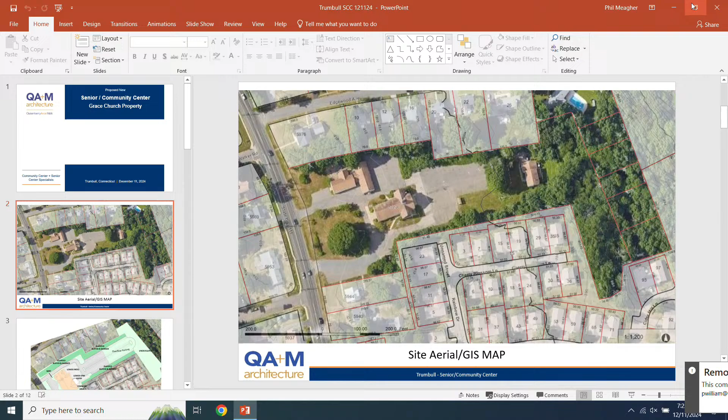He's controlling it. You're not? I got it on. You should be able to. Your presentation, I hope. Talk into the mic, we can't hear you over here. There's like a vent that's on. I gotta talk loud, huh? Okay.

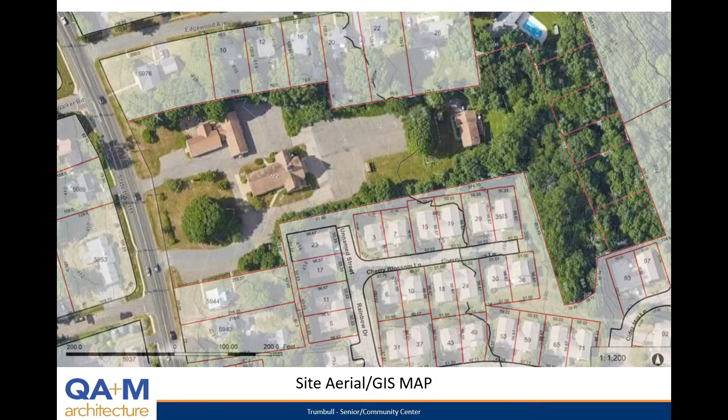Okay, so here we are with the site aerial. For your question, Mike, the trees in question are in that big center area, and yes, the building is basically on them, right next to that big tree. It's not actually on it, but it's next to it. But the parking lot would be where it is now.

So here's kind of a proposed schematic look at the site plan. You see the gate on the drive going down. I changed the label for the planted buffer, so it's a planted buffer and a barrier around the two side property lines. You see the overflow parking, and then we're labeling the back of the property undeveloped. We don't have any plans on doing anything back there.

Then some of the additions that came from the plan changes with the manipulation of the gym: we have a lower gym entry or kind of a little amphitheater. One thing Tom and I talked about today was, we see how it is there, that's about 1,500 to 2,000 square feet of patio outside the activity room. He was thinking we can actually make that area bigger, to extend it to the east and create a nice outdoor area that's kind of sunken in.

So upstairs, the plan really hasn't changed much. We've added some things to help you visualize what goes on in the spaces. As you come in the front vestibule, you still have the library lounge on the right side, the admin area on the left—or I guess it's everybody's right and left opposite as you're looking at it on the screen. Bathrooms, then you come down to the cafe space, and we've laid out a furniture plan for it. We have an outdoor patio that would be outside the games room and accessible from the games room, and then a conference room.

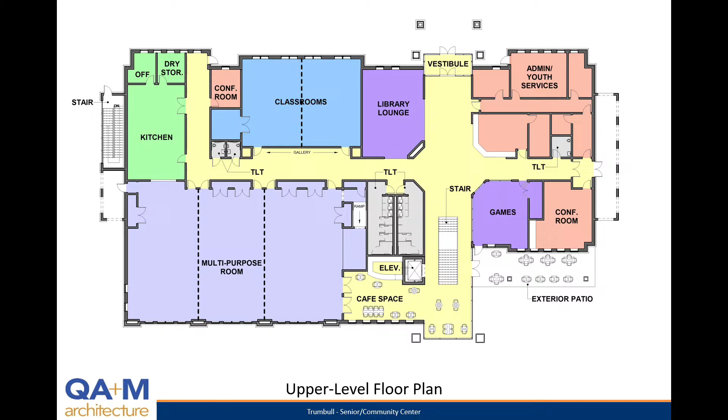And this is the newer plan downstairs. If we come in from the bottom, you go in the vestibule, into the lobby, there will be a grand stair, a monumental stair that will take you up to the upper level. You have the food pantry with 3 offices inside, and as you go back, the arts and crafts room is on the right. Then toward the end of the hallway, you take a left, go down a ramp—it goes down about 2.5 feet—and you get into the gym.

So the floor level from the main part of this lower level to the upper level is 21 feet. Now you go down another 2.5 feet, so that gives us 23.5 floor to floor, which should give us about 19.6 to underside of structure—so you're just about 20 feet to underside, and that's our estimate. We really have to engage our structural engineer, have a design made, and tell them to maximize the clear height at the bottom without going down too much more.

As you can see by the footprint, there is a basketball court that will fit—a middle school basketball court similar to what we had at Hardy Lane. Those are those lines, and then you have the 3 pickleball court lines behind that. We've changed the name—it's an exercise activity room—made to be used for dance classes, activity classes, pickleball, basketball, and you're high enough to do basketball, volleyball, and some other sports.

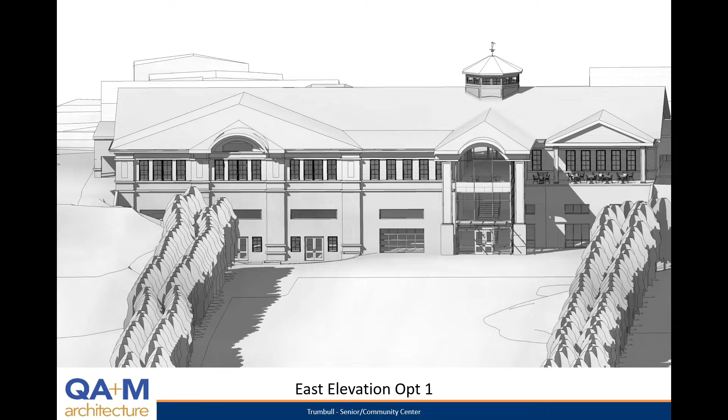On the left side of the building there's a sunken patio area. As you go over to the right, you have the access for the food pantry, then the main entry. Then there's the arts and crafts room on the right side of the building on the lower level. Above that you have the games room with the outdoor roof patio.

I see you have some of the houses modeled in outside. Would it be able to look at a point of view from the house? A lot of folks on the street were interested in what they would be able to see. Okay, that's something we can do next time. Thanks.

Dean Fabrizio. I just want to make sure they knew your name. Rocco, another question. Dave Galla.

So in these schematics, and this is very well done, I do like to see the buffer in there. That's incredibly helpful. All the plantings that are on both the left and right side of this particular image, would that include the current tree line that is along the Long Hill Village?

No, this is in addition to it. This is all up to our landscape architect to decide what goes there, to decide the heights and what's going to grow good next to those pine trees. Sure.

So it's conceptual at this point, but conceptually that's in addition to the pines that are there. The width of the buffer is what we're trying to get across with these images, that it's considerably wide.

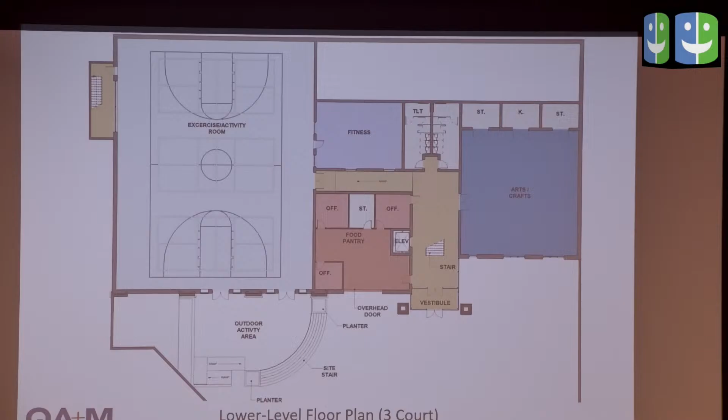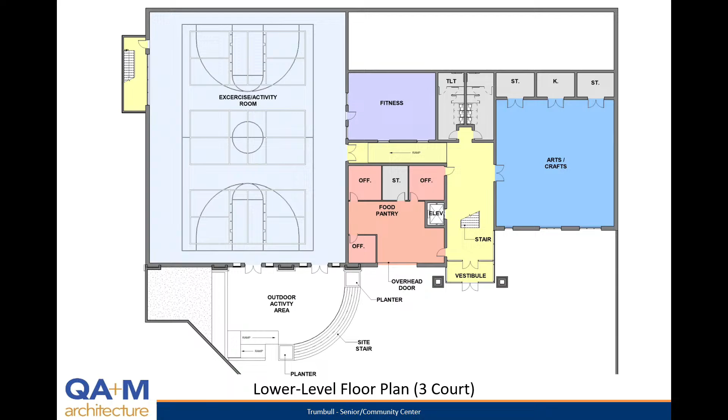Let me make sure the intent comes across that this is supposed to be a multi-sport space. The intent is not, by the committee standards, to introduce a space where tournaments can be had. We don't have the height for that. And if you look at the plan, there isn't enough room for bleachers, so there won't be any people spectating here. The intent for building out this space is for the seniors to have a spot for sport, for kids, as Lori mentioned. Ultimately, it's under the purview of this committee, and Michelle and Dimitri, to determine what happens in that space.

Well, I told Kelly she could go next. If you can turn off your mic, Ron, please. Thank you.

Are we moving on to other questions? Okay, the gate. It's not Ron. Vent off? Okay, no, the issue is the echo.

There's a way in and a way out, right? Are we only putting a gate on the one side, or are we putting gates on both entrance and exit? No, we're only putting the gate at the entrance to the lower parking area. Got it, okay, thank you.

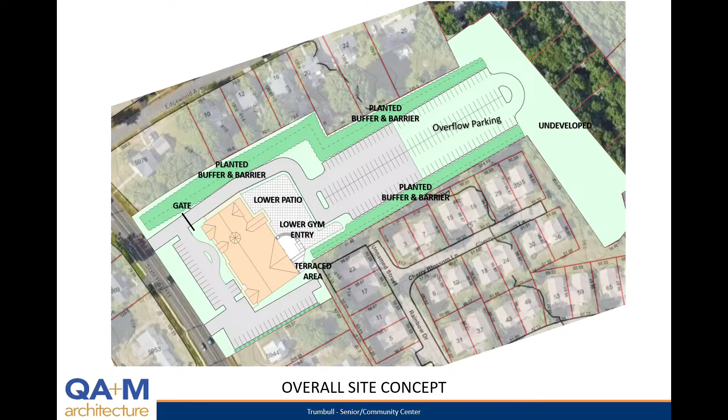Go ahead, Tony. Yeah, thanks, Don. I just wanted to voice my support for what Dave and Lori and others are saying. I think we are a community facilities building committee, and I think there should be some community elements here. I think a basketball court, some kind of compromised basketball court, is a good thing. We have other options for tournaments and intense use, but I think it would be short-sighted to just rule that out. We are, not for nothing, 38,000 people in this town, so we try to accommodate as many as we can without impeding on the neighbors. So that's my perspective. Thank you.

And Ron, just state your name when you speak, please. This is Ron Feligno. Dimitri, I know you're back there. I can't see you quite behind Rocco, but are you there? Okay, Dimitri, I'd like to ask you a question.

What is the actual activities that take place relative to basketball now through Parks and Rec? Well, Parks and Recreation, especially during the winter months, utilizes whatever available space there is within the school system. Excuse me, Dimitri, speak up a little louder, I'm having trouble hearing you, that's my fault.

Sorry about that vent. Parks and Recreation utilize gymnasium space wherever it's available within the various schools in town. Generally, we're not going into any of those spaces until school lets out, so during the day there's really no activity in this gymnasium or any other.

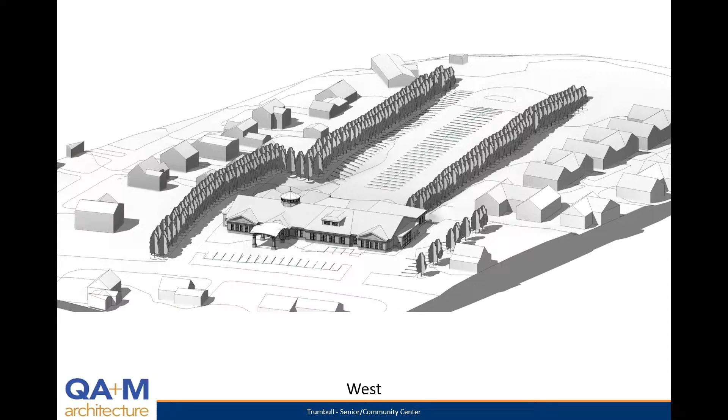One concern that one of the neighbors brought up on Edgewood was this cafe overlook that we have. Do you have any idea how much that's going to overlook neighbors' properties? Well, where it is, let's get it in the back. Essentially, the level of that overlook is at the street level, or the grade level of everything else that's around it. The only vantage point it has is directly east. It has some vantage point north, but that should be blocked by the barrier buffer area.

Also, the way the parking lot grades right now, some of the folks in Long Hill Village were concerned that the grade comes down towards their property. Would there be a need for retaining walls potentially for the new parking lot? That's something I really gotta have the site guy take a really good look at. My initial thoughts, in conversations with him over the last couple of days, are that we'll have to remove material to put the building kind of in the bank of the hill. Do we take that material and use it to berm up the property edges, to create almost like a little hill, to keep anybody in the parking lot from eyeballing into the neighboring properties? That's all my questions.

Thank you. Any other questions from committee members?

So just one further question. Dave Galla, and again Rocco, thank you for putting all this together. You just talked about removal of material and using that for berming. Could we also keep in consideration any possible drainage that may affect the neighbors on both sides of these properties and try to mitigate drainage issues? That's part of most zoning regulations, that you need to keep any water that's on your property. Okay, thanks.

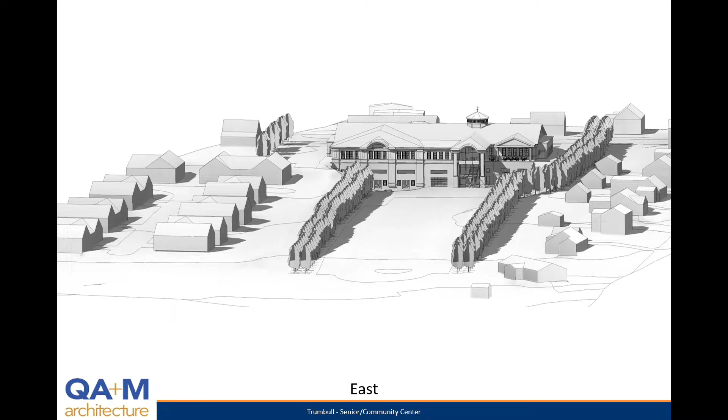Okay, thank you. Can I ask one more question? Oh sure, Dave Galla again, sorry. To the best of your knowledge, could you tell me approximately how high this building is in its current state? You mean like off the grade in the model here as we're showing it? I believe it's at 14 feet to the eave. 14 feet from the front, of the building? Okay.

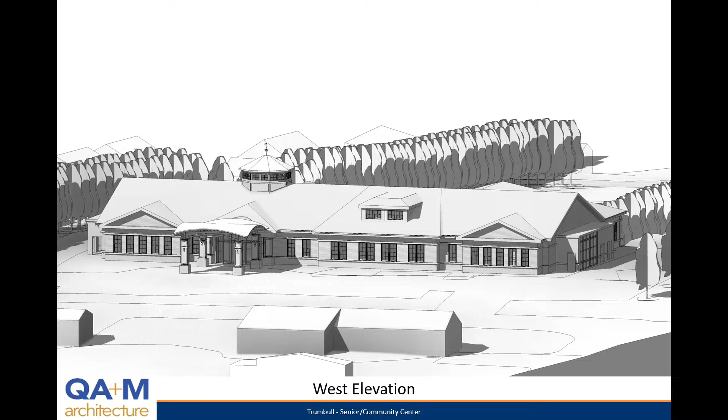And how does that compare to the current church facility, taking the steeple out? It's about the eave of the church. Well, the eave of our building here and the eave of the church, this is about 1.5 feet taller at the eave, but the ridges on this building are much lower. I don't know exactly how much lower it is than the main ridge of the church, but it's definitely lower than what the church is. So the overall height is lower than what's there. That was one of the concerns that we heard while we were out on our tour.

Thank you. Next on the agenda is next steps, and Lori said she has an update. Lori, can you get on again? I can try. Can you hear me? We can hear you. Okay, I'm going to try to talk a little louder.

I know you guys touched on the abutting neighbors walking tour. I just want to thank everybody who took the time, including Rocco, to go do that. Most of the feedback has been talked about this evening. If anybody else who went on that tour wants to add anything, but again, thank you for taking the time.

If not, the next steps we've been talking about for a while, and Rocco can probably follow up with this, but Tom, who is not feeling well and I believe in a different state, did send me a little update on some of our timing for our next steps.

One of the next things that has to happen is the traffic counts. The plan right now is right after the holiday, so between approximately January 4th to 10-ish, somewhere in that week depending on weather and timing. That would make the traffic report ready at the end of January, which would lead us to a meeting with the Traffic Commission, hopefully in early February. All of that has to happen before we can go to P&Z to look for the 8-24.